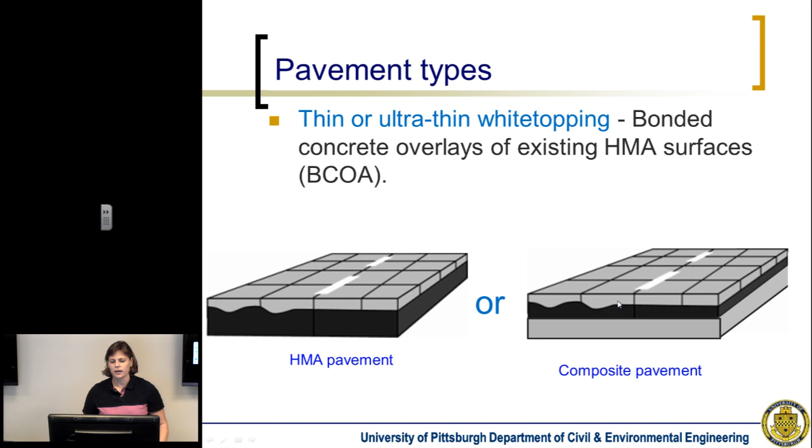And so this could be a single layer of asphalt that's distressed that you're placing your bonded concrete overlay on top of, or it could be a composite pavement where you have an overlay on top of your old concrete and now you're placing a new bonded layer on top of that. So typically BCOA designs result in overlays that are 3 to 5 inches thick.

If you start getting closer to 6 or more than 6 inches, you want to try to use an alternative design procedure as well, kind of as a check, so that you can see exactly where you're at. When you start getting thicker slabs, the slab itself starts carrying a larger portion of the load as opposed to the composite structure. So that's why an alternative procedure as a check is good if you're going to be 6 inches or greater.

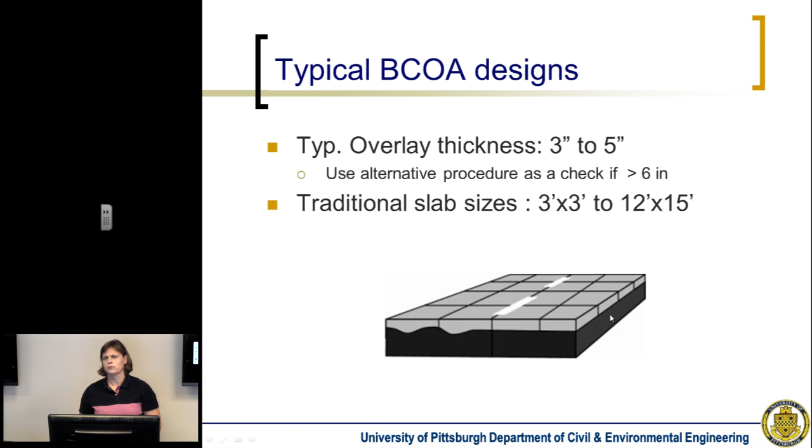Typically the BCOA designs consist of overlays that are 3 to 5 inches thick. If you start getting a little bit thicker, 6 inches or more, you probably want to double check this with an alternative design procedure, because at this point the slab is sufficiently thick that it's carrying a large portion of the load itself and it's not acting as much as a composite structure. Since these overlays are so much thinner, we also use smaller slab sizes, traditionally 3x3 to 12x15 slab sizes.

So now to go on to the BCOA-ME design guide itself and to walk you through how this procedure works. If you go to www.engineering.pitt.edu/Vandenbossche/BCOA-ME, you'll find the design guide, and if you're watching this video, you've probably already found it, and this is what that site looks like. So if you click on Design Guide, it takes you to the guide itself, and the first thing you want to look at is the general information that you're going to fill in.

So what you need is the project location, and this is the longitude, latitude, and elevation. Now you can find this using a smartphone, the GPS in your car, or if you're doing the design in your office, there's a tool here where you can go and select your geographic information. And you have two options to do this.

First, you can go to an open web page and click in any area where your design is going to be, let's say Pittsburgh, Pennsylvania, and click Find Elevation, and you'll see that it provides you elevation, longitude, and latitude, and then you would go over and enter this information into the design procedure itself.

The other option is to just go to your drop-down menu, go to Pennsylvania, and then pick the city with the climate most similar to yours. So if you don't have this information, you can go to the geographic information if you're designing this on your desktop, and then you have two options. You can either go to a web page and type in the location of your project, find elevation, and then you have your information right there. You'll then have to cut and paste or type that information into your design sheet.

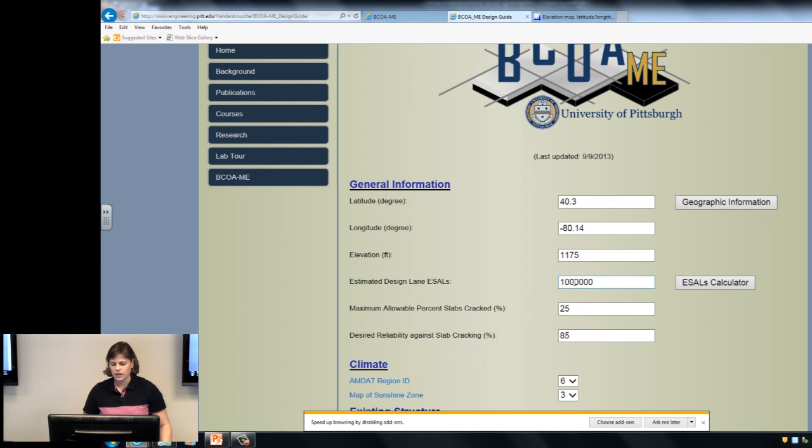If you don't have the one-way ADT, you can also get a rough estimate based on the classification of your roadway. So typical distributions which were established by ACPA will be used to generate your ESALs. Okay, so once you have this information, you can hit submit. We're just going to enter in 1 million. Now, then we enter in our criteria.

So the criteria is based on the % slabs cracked. I would suggest that you maintain the 25% slabs cracked and 85% level of reliability. And this is because these are the values that we used in the calibration process. If you notice these information boxes keep coming up at the side, this gives you little information regarding the inputs. So next to a lot of the inputs, you'll have bits of information that you can use to help you define those inputs.

Okay, so we've defined our traffic, our location, our failure criteria, our reliability. Now we're going to go down to the climate. With our climate, we have 2 pieces of information that we want to define. And we can determine our annual mean daily average temperature based on our climatic map. And again, if you need help, you can go to the right of your input box and it provides you with a little bit of information. So click on this blue writing and that sends you to the map.

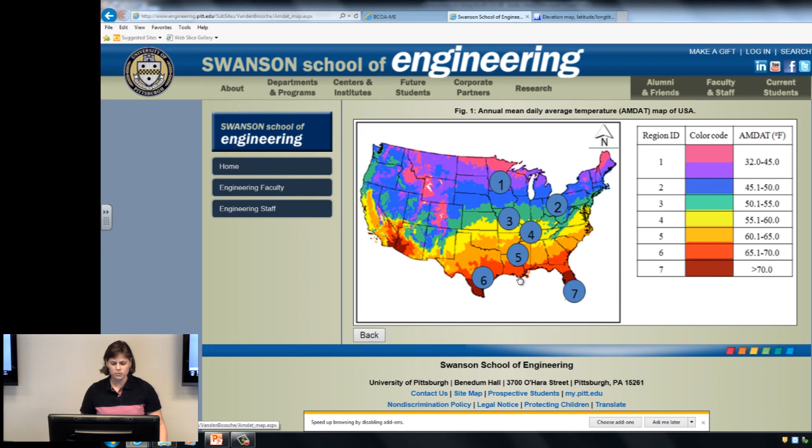Now for each of these areas where you're clicking onto a separate site, you can either click right on that site and it'll send you back to the design page, or you can click back. Either option works. So we're right here, Pittsburgh, Pennsylvania. This will be in our region 2. So then we either click on the map and it'll go back. Now when you click on the map or the zone, it doesn't automatically enter it in. You still have to manually enter in your region.

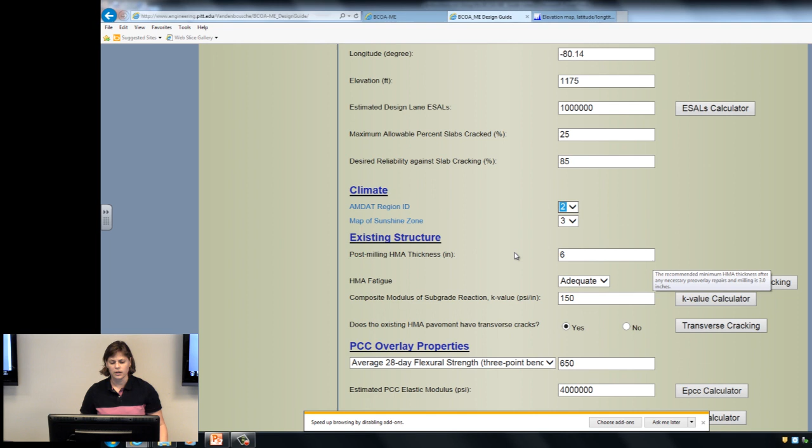Now we go to our zone for our sunshine. Again, it takes us back to the map, Pittsburgh, Pennsylvania. We're in zone 3. We can either click on the map and it'll send us back, or we can click on the back icon. But again, you must enter in the zone manually.

Okay, now we're going to define the existing structure, the asphalt pavement that we are placing this overlay on top of. So the first thing we want to state is how much asphalt will remain after milling. And again, this is after milling thickness. So let's stick with 6 inches of asphalt after milling.

Now we have to characterize the asphalt condition, and this helps us establish what the resilient modulus of the asphalt will be. So again, you go to the box and we're defining the condition of the asphalt based on the amount of fatigue cracking. So it's adequate if the fatigue cracking that we see out here by percent area is between 0 to 10%, and 10 to 20 would be marginal. So let's say it's adequate for this.

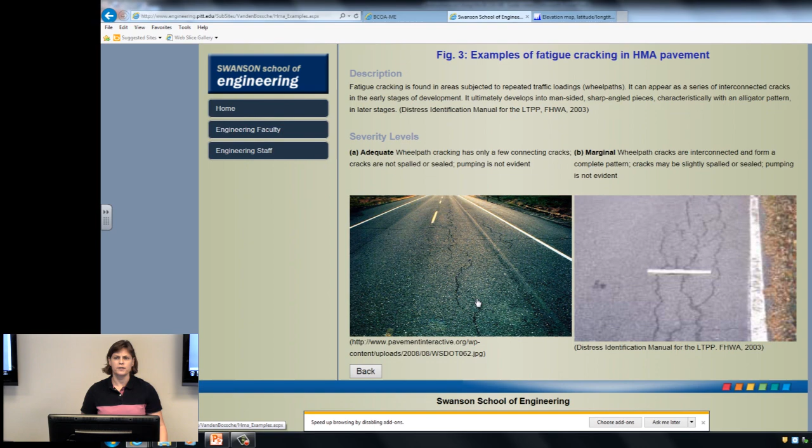If it's been a while since we've had pavement design and we can't quite remember what fatigue cracking is, we can click on this icon and it'll send us over to some examples of fatigue cracking. So this is fatigue cracking. What percent area do you have? And that's what you would base your characterization of your asphalt fatigue on. Okay, so we've defined the conditions of the asphalt layer.

Now we're going to look at all of the supporting layers, and we're going to define their stiffness and their contribution to the overlay based on the composite modulus of subgrade reaction. Now, defining the composite modulus of subgrade reaction is pretty straightforward if you just have a single asphalt layer and you're placing your overlay on top. So the composite K value would be the combined stiffness of all layers below your asphalt layer.

Now, if you have a composite pavement, then you have 2 different scenarios that you have to evaluate. And you can do this by pulling cores or other means of estimating the bond condition underneath the asphalt. So what we have to do is determine whether the asphalt is bonded to the old concrete layer or if it's unbonded to the old concrete layer. Now here, if it's not bonded, then we consider this concrete layer as contributing to the composite K value.

If it is bonded, then this existing concrete layer is going to contribute to the stiffness of the asphalt layer. So when you're determining your K value, your composite K value for these composite pavements, you have to define whether the underlying concrete layer is bonded to the asphalt, and if this is indeed the case, then that will be incorporated into the stiffness of the asphalt, or if it's unbonded, and then it's going to contribute to the composite K value stiffness. So once you've established that, you can go back into your design guide and establish your K value.

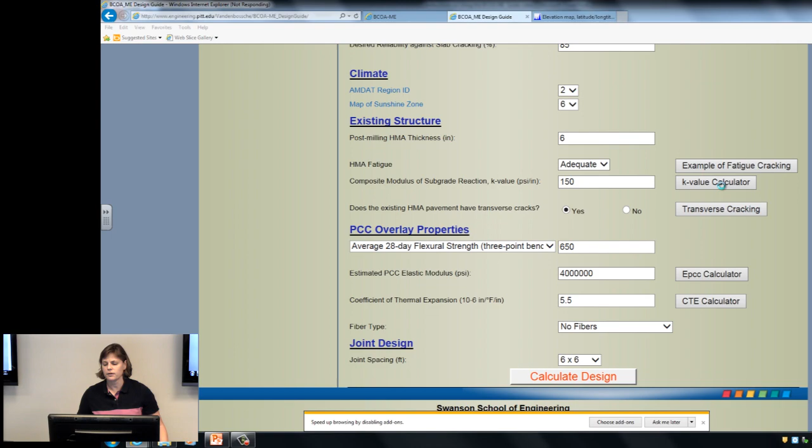If you're not quite sure how to do this, there is a calculator here to help you establish your K value. Okay, so when you're establishing your composite K value, it's pretty straightforward if you just have a single layer of asphalt. So it's the combined stiffness of all of the layers below the asphalt layer.

Now, if you have a composite pavement, you have two options. You have to determine whether this asphalt is bonded to the existing underlying concrete layer. Now, if it is bonded, then that's going to contribute to the stiffness of your asphalt. If it's unbonded, then when you're establishing your composite K value, you must include the stiffness of this existing concrete layer as well.

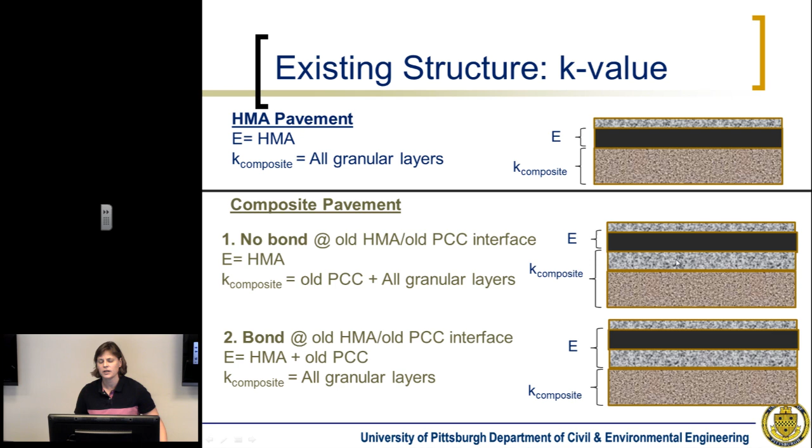So I'm going back to our design guide. If you need help in establishing your K value, you can go to the K value calculator, which takes you to the ACPA website for establishing your K value. Okay, ready? Yep. So here it is, and you can do this just as a single layer. So let's say we have a resilient modulus of 7,000, and that gives us a K value of 160.

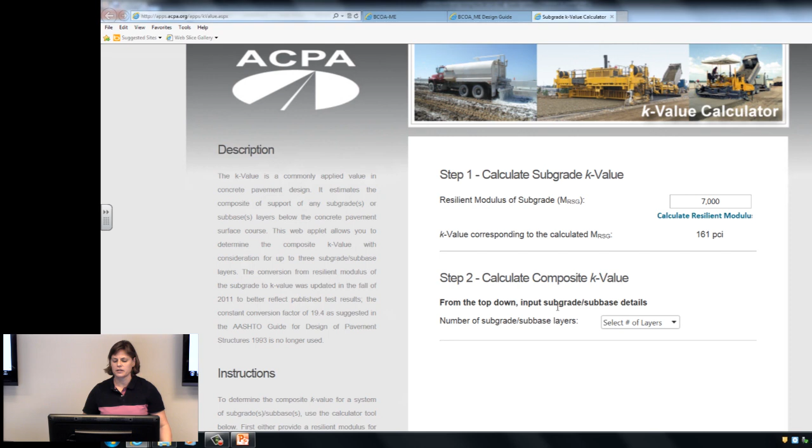If we have multiple layers that we want to evaluate the composite stiffness of, then we can go into step 2 here, and it'll provide us with a way of doing that. Okay, so getting back to our design. Let's go with 150 as our composite K. Again, when we had a resilient modulus of 7,000, then it was about 160, so 150 will get us in the ballpark.

And the next thing we need to look at is whether there's transverse cracking or thermal cracking within the asphalt. Now, if these thermal cracks are deteriorated, and again, if you can't quite remember what thermal cracks look like, this is what you have. If they're deteriorated to the point that aggregate from the concrete overlay can penetrate into the crack, then you want to do some type of repair before placing the overlay.

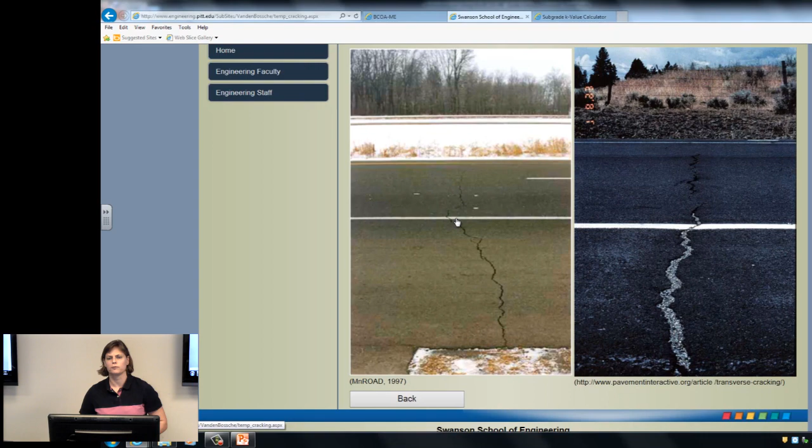But if it's not deteriorated, you do have the potential for reflective cracking under certain conditions. So you can account for the possibility that you might have reflective cracking by stating yes, we do or do not. And this is not going to affect the thickness of your overlay. It's just going to tell you if you might need to do something to mitigate cracks from reflecting from the asphalt layer up into your bonded overlay.

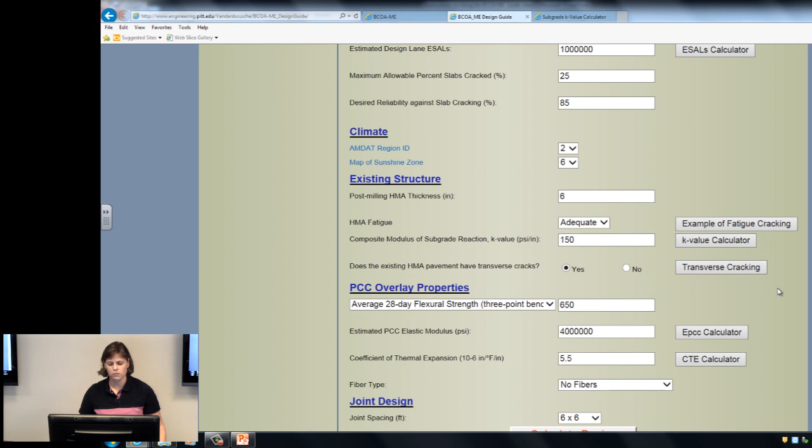Okay, so we've defined the existing structure. Now we need to define the properties in the concrete overlay. We can first define the strength by entering either the 28-day 3-point bending or the compressive, and it'll then convert it internally to a flexural strength. The elastic modulus of the concrete can be entered in directly, and again, this is a 28-day value, or you can use the calculator to do so, and then it's going to estimate it based on the strength you entered.

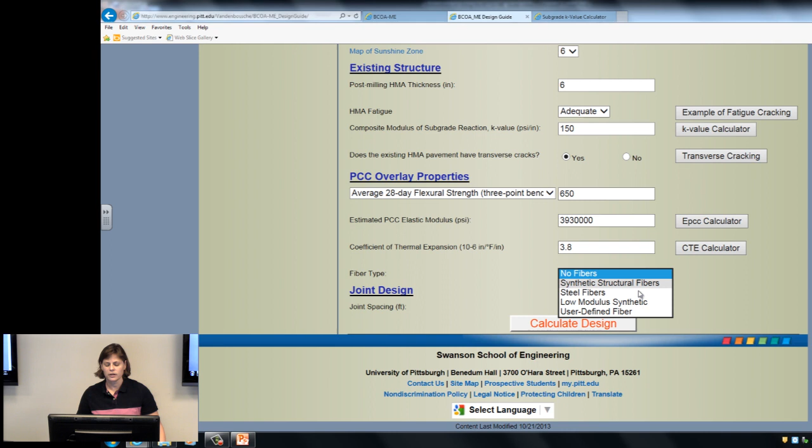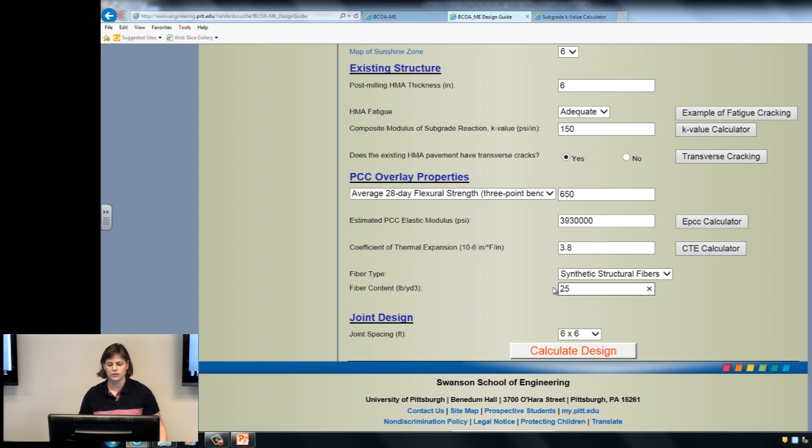The coefficient of thermal expansion, you can either, again, enter directly, or you can calculate it based on the aggregate type that you have. Okay, now if you're going to include fibers in your overlay, you'll want to enter that here, and you'll have to define the type of fiber that you're going to use. If you do include fibers, you're also going to have to add the dosage rate. So, for example, you might add 25 pounds per cubic yard. Let's now use structural fibers for this design example.

Okay, finally you need to design your joints. Here we'll go with a 6x6, but you'll see your options that you have here, and then you calculate your design thickness. So what it provides you is the thickness of the overlay. So here the actual thickness design was 3.64 inches, and you'd probably round that to 4 inches. Is there potential for reflective cracking for this type of a structure? Yes. So you probably want to do something to mitigate the potential for that, and there are several options that you can look into.

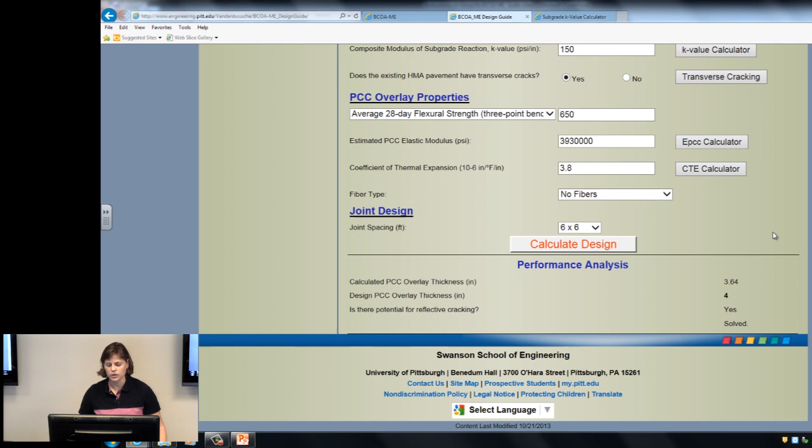This is how you use the BCOA-ME design procedure, and I hope that you'll take the opportunity to look through it and try it out. And if you do have any questions, you can go to the website where the procedure is, and there's also an opportunity to provide feedback.